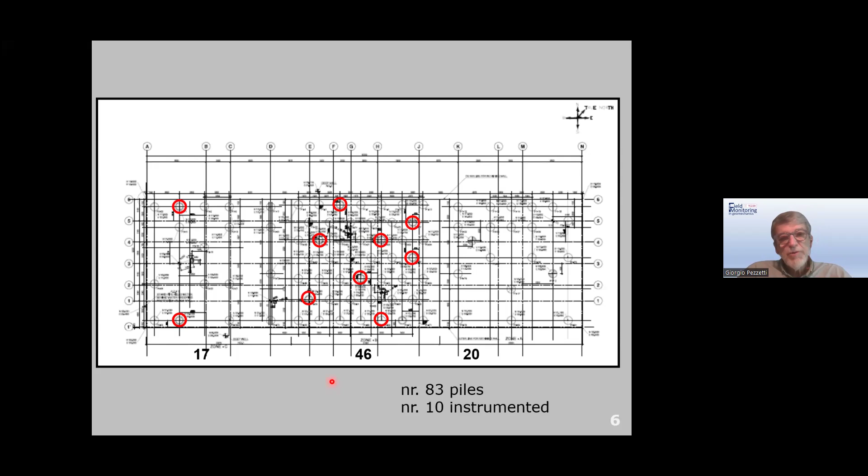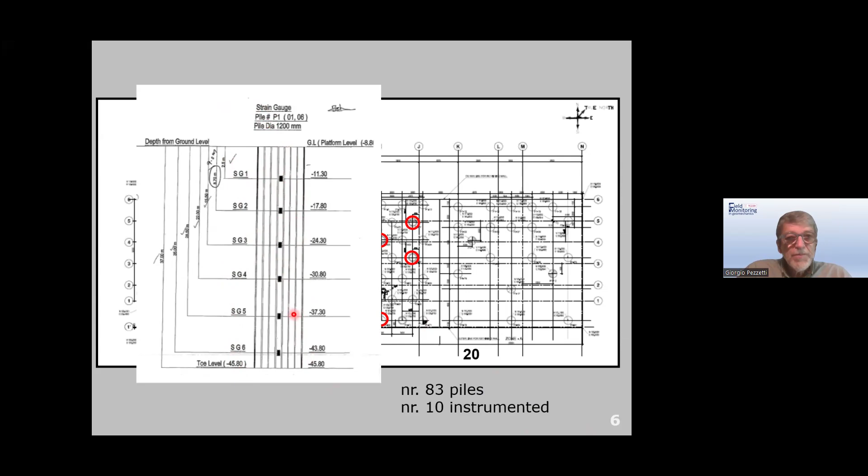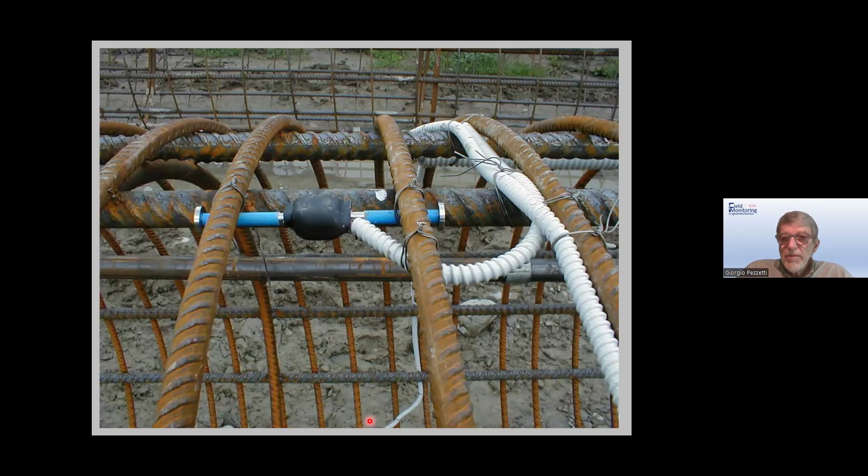The piles were approximately 45 meters deep. The diameter was 1.2 meters. And the request was to install 6 sections of strain gauges, 4 strain gauges each section, at different depths in order to measure the distribution of the load. Strain gauges, the classical strain gauges with vibrating wire sensor, have been installed on the cages, and they provided the value of the strain into the pile to be transformed into load.

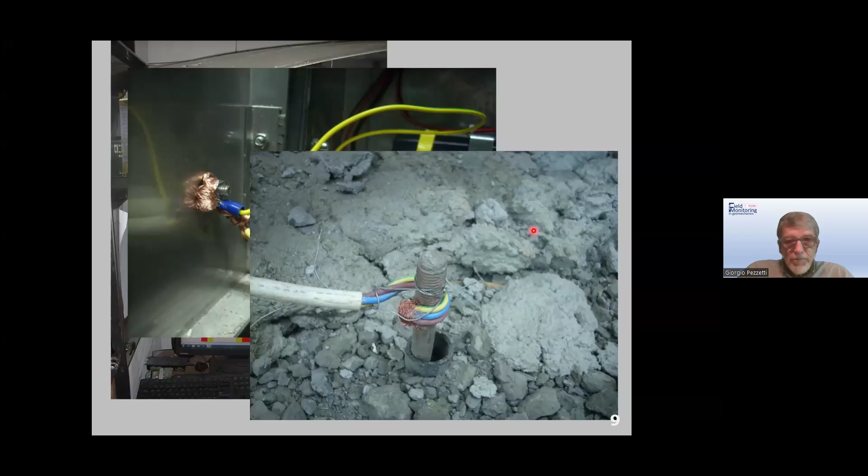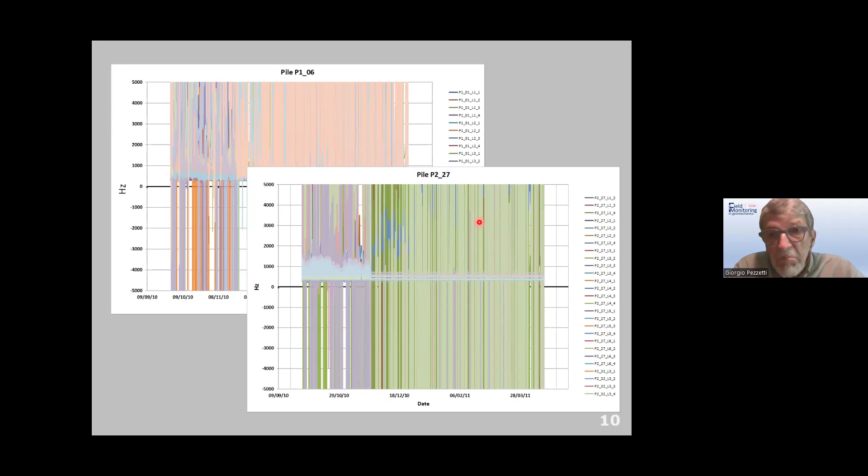Because we started looking into this data in order to understand if it was possible to get some information from this mass of signals, which seems to be completely random. Okay, so we tried to understand what was going on. We selected some piles, and here I show you an example. This is pile number 27, I guess. And this is what we got as monitoring results. You see here the date is approximately from mid-September to end of March, let's say 5-6 months of measurement.

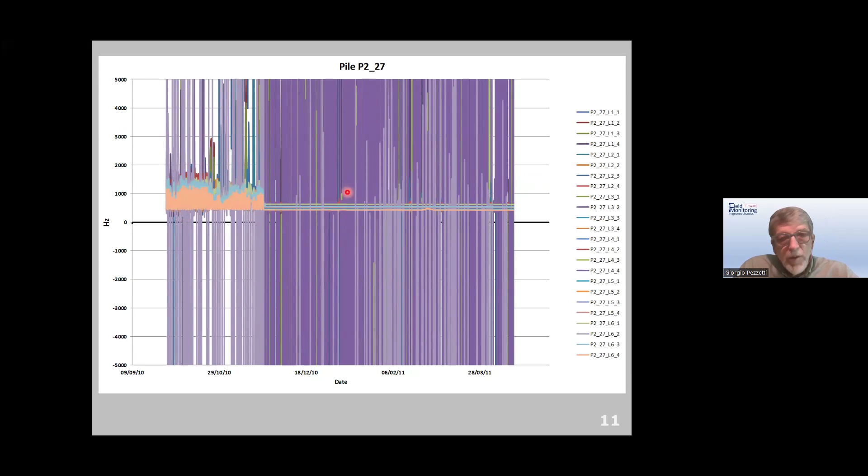We looked at this data, and as you can imagine, the first point we got is that there is an initial part of measurement with a certain behavior, and then another one. Of course, we checked the numbers. Here are the numbers. The gauges were vibrating wire strain gauges, so the values we were collecting were the frequency or the digit. It depends what you use.

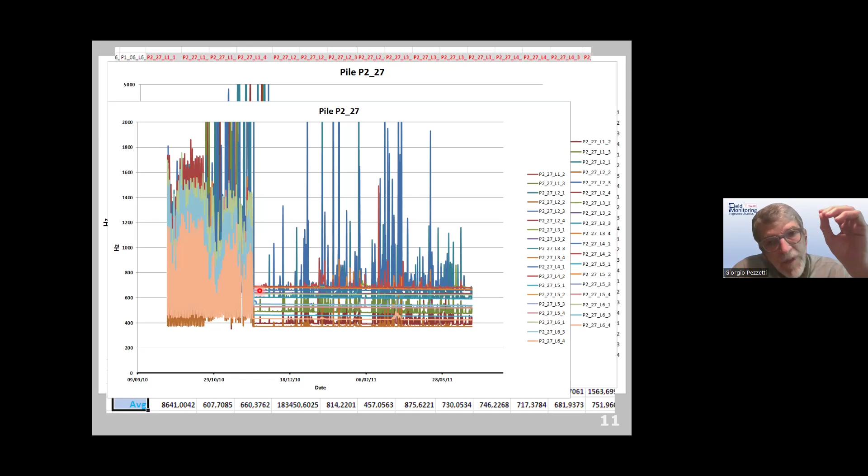And each instrument was providing a value which could have been a real value, because being inside a pile, from the top to the bottom, the load is reducing, or should reduce, of course, because these are skin friction piles. Sorry, I forgot to mention. The load is reducing, and so it is correct that we start from a higher value and go down to a lower. So again, looking into the data, trying to take out what is embedded in the data, even if at the beginning it seems to be a complete mess, we realized that we were measuring something. And so we proceeded with this analysis.

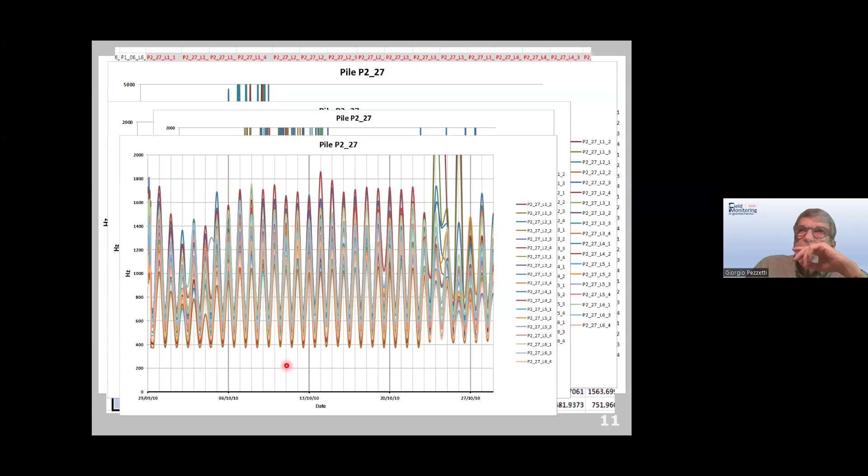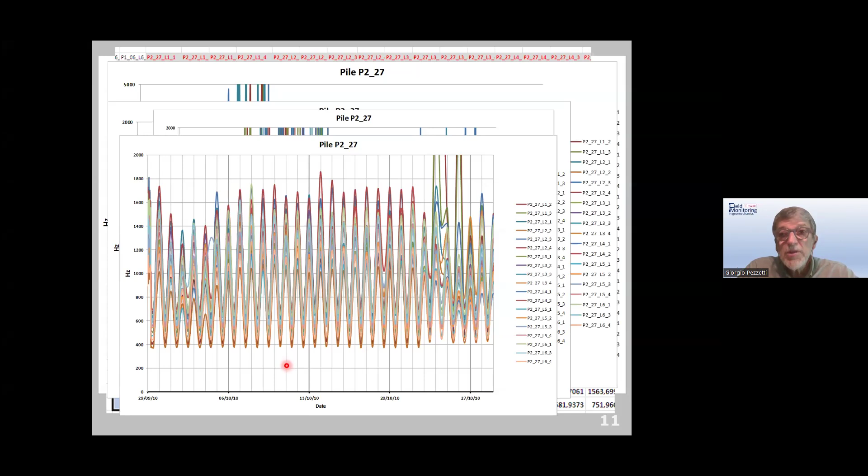And as you see, at the beginning we had this quite unstable part of values, and then stable. Why this? Because if you remember the two pictures I showed regarding the grounding or earthing system of the data logger, we realized that the connection of the data logger to the earthing or grounding, I don't remember the correct English name, sorry, was not good enough. Or better, the area where we installed the ground stick was a very disturbed area because they were building the building. And so there was a lot of machinery working there, connected to the same power line, and this created this disturbance. When we realized this, we disconnected the ground system and we obtained something better.

But there was even another point that we realized. This is the same graph as before, just changing the horizontal scale. And you see this fluctuation, this sinusoidal trend of data before reaching stability when we disconnected from the ground. So we said, what is going on there? We tried to analyze the situation in more detail. And when we moved to the next part, we saw that if we cancel the initial fluctuation part and use a new zero point here, that is the date when we disconnected, and we again filtered the data a little bit, we obtain this plot.

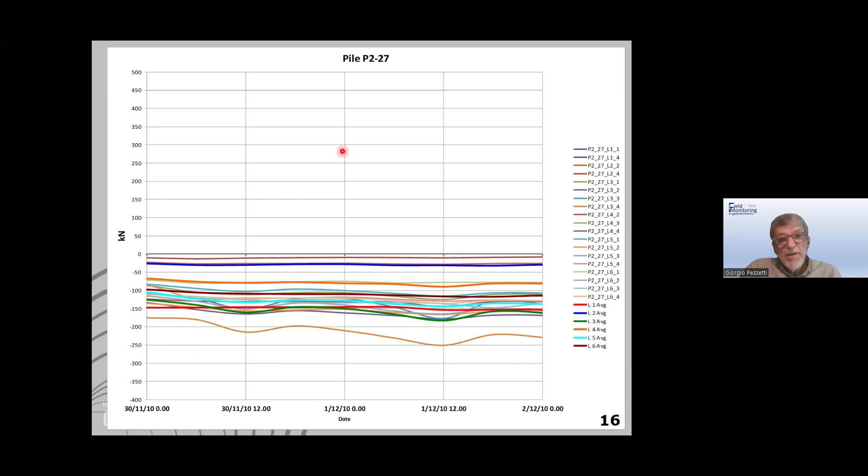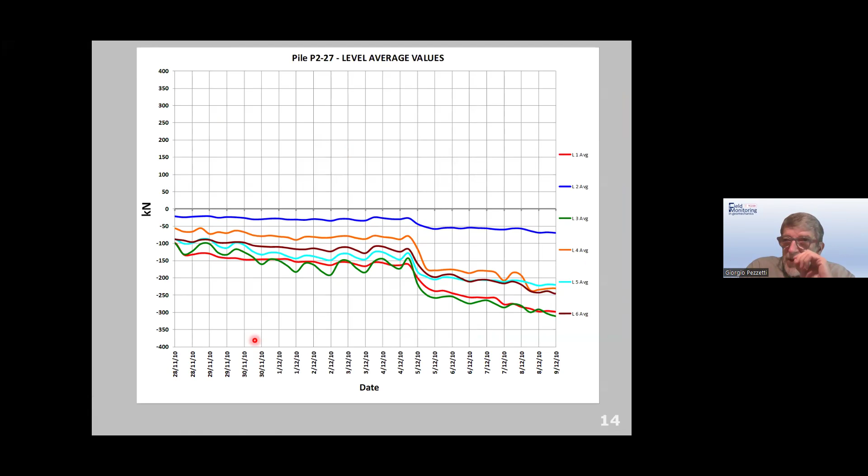And this justifies this behavior, up and down, up and down. So again, we have to analyze very carefully all what we can say is the context where we are measuring. Because if we just look at the point where we are, probably we miss something.

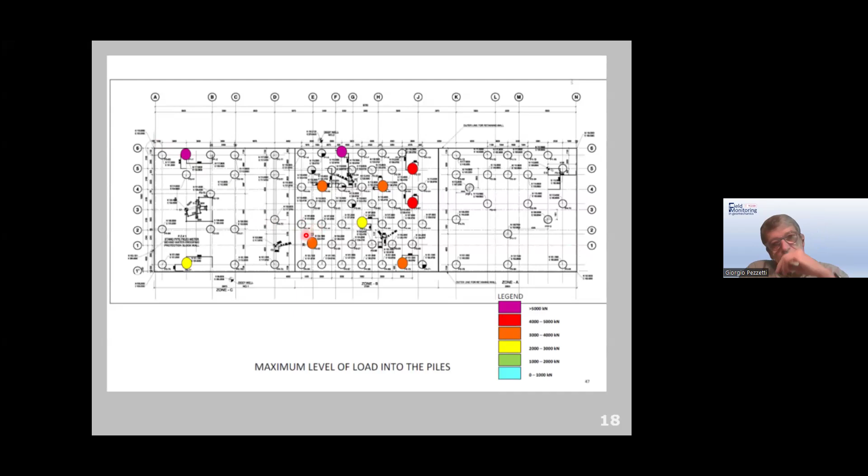And this is what we got. You see the final global behavior. During the construction, the load was increasing. At the end of the construction, the load was stabilized. That was a quite good result if we compare with the initial plots that I showed. Okay. Using this result, it was possible to define a distribution of load from the maximum value, which is the purple, to the minimum, which is the yellow one, and the distribution was that. And the designer used these results in order to verify their hypothesis.

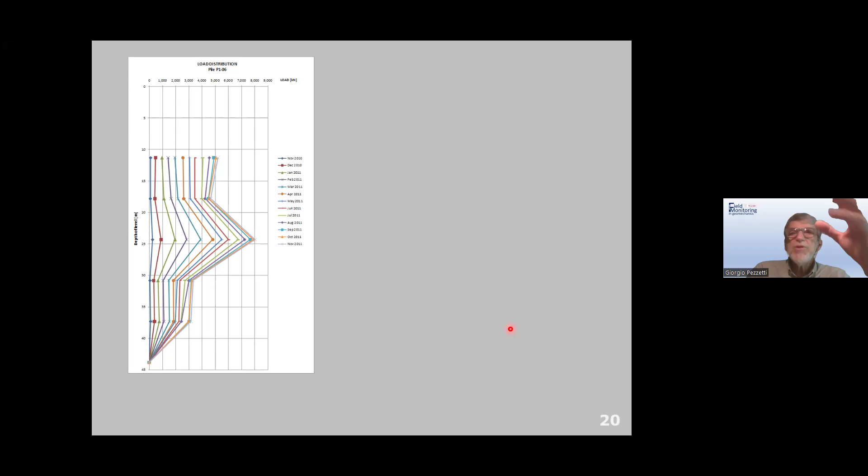And so again, we have to look into the piles in order to understand how piles behave and why we are measuring this. Are the instruments not working properly, or is there a reason for that? We tried to analyze in detail, and again, we started from a plot because I think that starting from the plot is always the best way to analyze data, because the plot immediately gives the idea of what is happening. If we read the numbers, it's more difficult to understand what is happening.

But of course, here, for example, we see that there was one instrument which was not working, another one which was giving very strange results. 14,000 is an unreasonable number, and others which were quite reasonable and similar to each other. So we said, okay, we can use these two and not the others. And by using only these two, we obtain something like this, which is quite reasonable, okay? And we did the same for other piles.

And this is an example of application of what is called engineering judgment, because no one of us knows exactly what is happening here. This is a hypothesis. So we say, two instruments are not working, the other two are providing reasonable data, we use that data, okay?

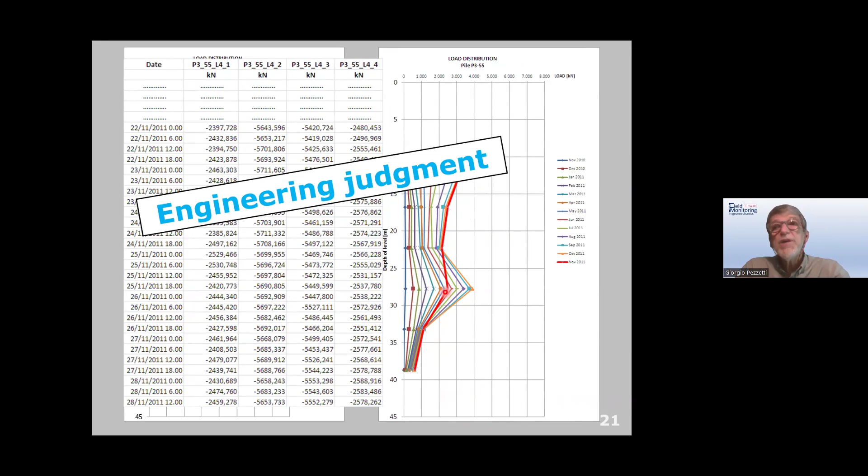But we can consider another point, that in order to move from strain to stresses or to load, we have to apply two parameters, the Young's modulus of the concrete and the cross area of the pile. What is the percentage of variation of these two parameters? In theory, 0, because we say the pile is 1.2 meters in diameter, so the area is such and such square meters, and the Young's modulus of that concrete is that value. But are we sure about that?

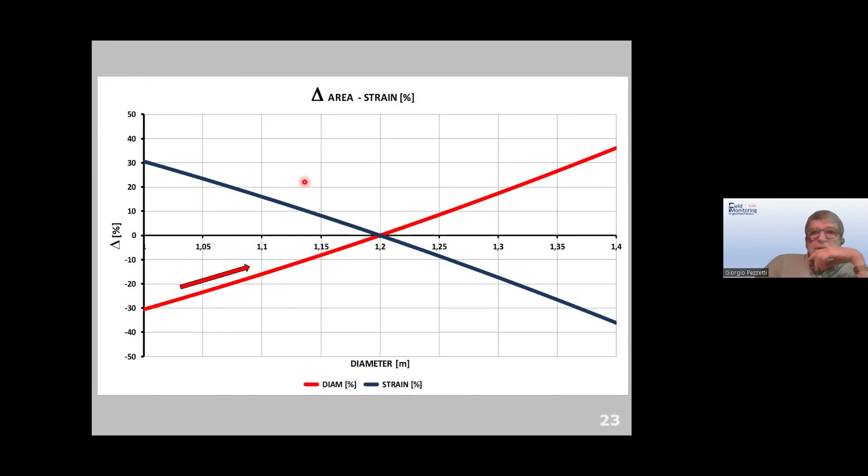And remember that the accuracy or the error or the uncertainty, call it as you prefer, of the measurement made by strain gauges is in the range of 0.5 to 2%. How much is the percentage of variation of Young's modulus and cross area? Look at this very simple graph. These are the nominal area of the pile, diameter of the pile is 1.2 meters.

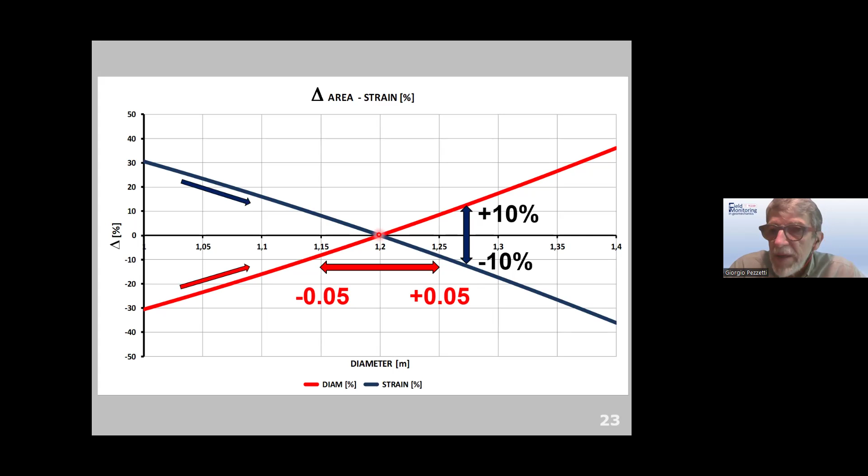I think you agree with me that the diameter of the pile is not perfectly 1.2 meter from top to bottom. It can be a little bit larger or smaller. And how much is this variation influencing the area? So if we move from 1.2 meter to 1.25, that means only 5 centimeter extra diameter. 5 centimeter means 2.5 one side, let's say, and 2.5 centimeter the other side.

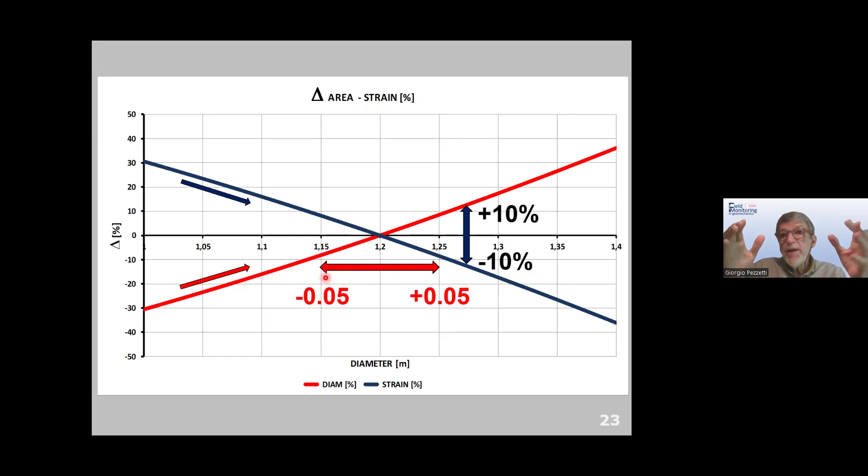5 centimeter in diameter means 10% in area. That means that if at a certain depth the pile is 1.25 meter in diameter instead of 1.2, the area is 10% larger. 10% larger means that strains are 10% lower. And the contrary, if the diameter is reducing 5 centimeter, the strain will increase 10%.

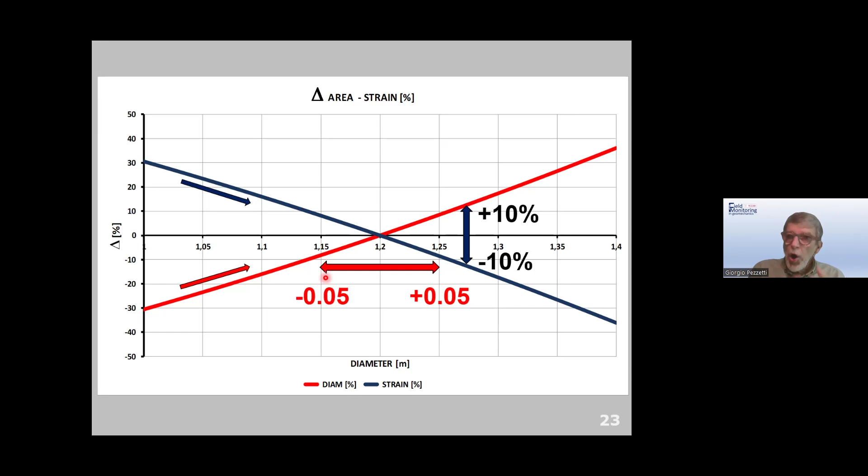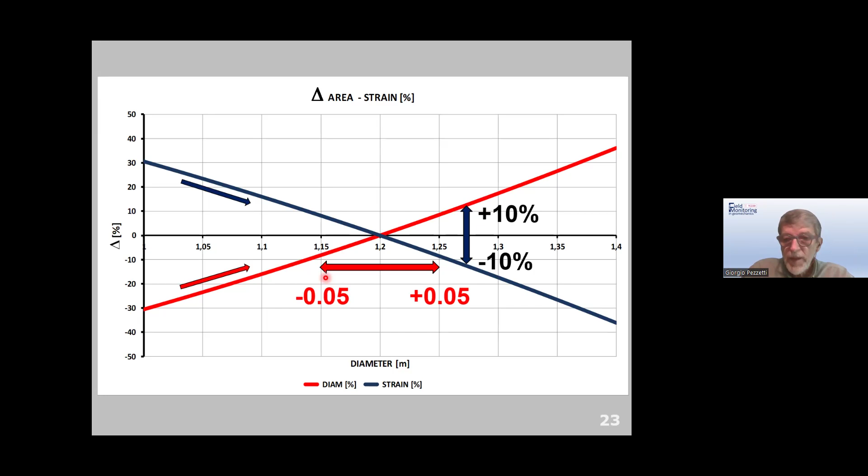So, again, we always say that the instruments are not working properly. They are creating error, they are not accurate enough, but please consider that sometimes the real uncertainty is in the structure, not in the instrument. Same for Young's modulus. Theory says that the Young's modulus is related to the strength and so on. But are we sure that the value is really the one that has been considered by the designer or not? And is it constant from top to bottom?

You know better than me how piles are cast at site. Sometimes the injection procedure is stopped for any reason. So concrete is maintained inside the mixing machines and so on. So it can change a little bit. In case of very high temperature, unfortunately, people start adding water to concrete in order to maintain it at the acceptable fluidity, and so the modulus can change.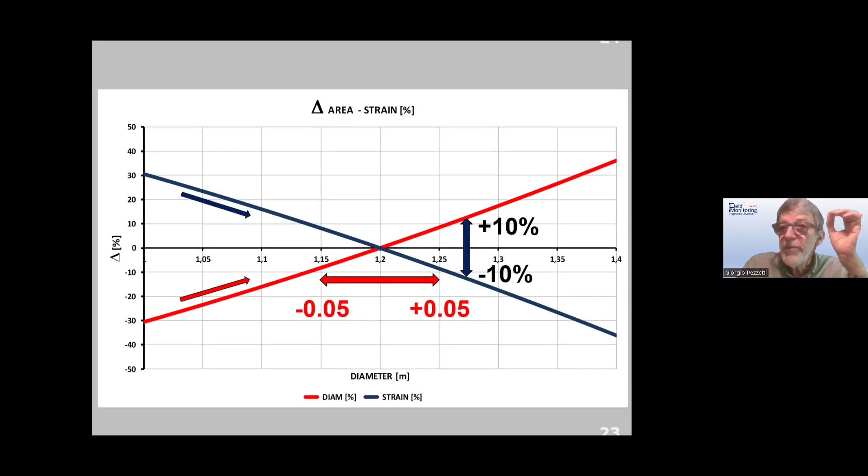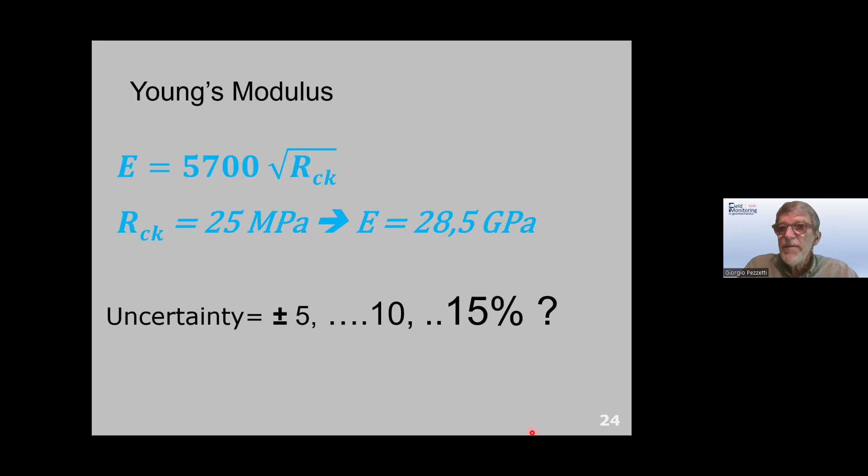Again, how much? 5%, 10%, 15%, I don't know. But probably much more than the 0.5 or 2%, which is the accuracy of the strain measure. So that's an important point. Don't say immediately that the instrument is guilty. We will see a very interesting sentence later on. Sometimes, or many times, it's not the instrument which is guilty. The point is that we don't understand exactly what is going on, or we don't spend enough time to understand what is going on.

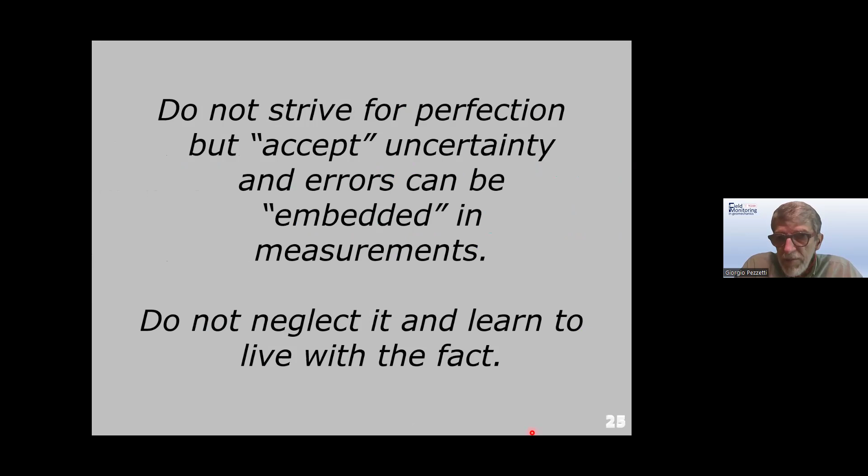That means that we don't have to strive for perfection. We have to accept uncertainty and error because they are embedded into the measurement. Don't neglect them, but learn to deal with the fact. The world we are facing is a world which is affected by error. We have to understand where these errors are, what the magnitude is, how they affect the measurement. Don't say immediately, no, the instruments are not working, throw away all the measurements.

The strain gauges in the piles we have seen are representing what is going on in the system, with all the problems we have seen, considering the tidal effect, the area reduction, the Young's modulus variation, the fluctuation of the signal due to the electrical problem, and so on. They are measuring what is going on in that specific status. So these are the words we have to remember. The number is the value, uncertainty, measuring unit, but the specific status of the system.

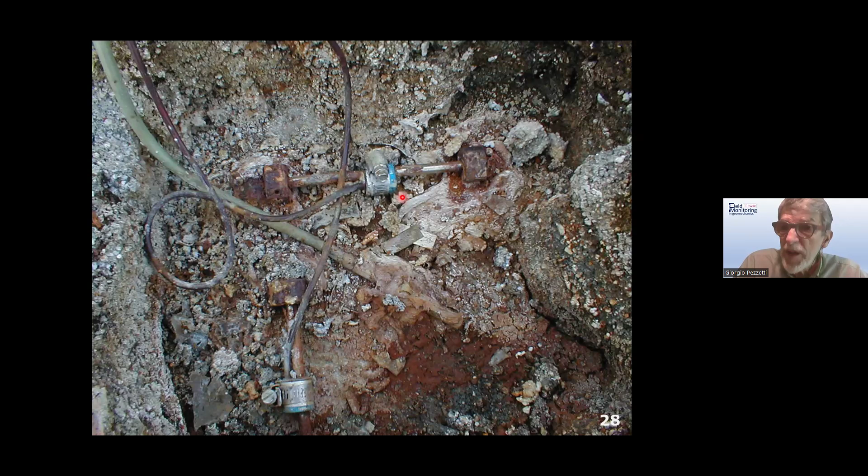That's important. Because a strain gauge like the one we have seen before, in a situation like this, is in concrete completely damaged by some chemical attack. If they are measuring something wrong, is it a problem of the instrument itself or a problem of the context? The instrument is measuring what it has to measure. And as Alex Feldman said almost 20 years ago, result expectation ruins the gauge innocence. The gauge is innocent till proven guilty due to design, misuse, or due to interaction with the material surrounding it.

Please, I'm not saying that the instruments are always working perfectly. We know that instruments have problems. But before saying they are not working, we have to understand what is going on around.

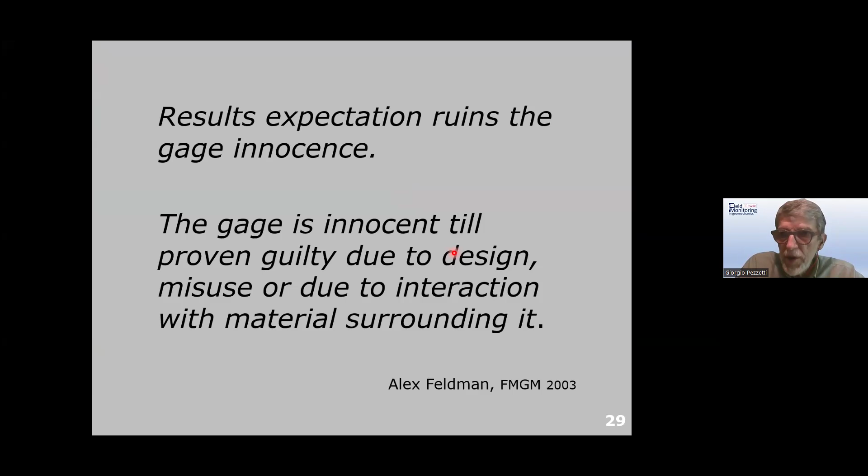And of course, when you collect data, we have to validate. What does it mean to validate? It means that we have to start from the measured data and end up with the presented data. Inside this process of validation, you should include all the analysis we have mentioned before and many others if necessary. So we have to check the operational condition, the working condition, the signal collection, the data reduction.

Data reduction, go back, loop of analysis, check and act. So it's continuous. We don't say that we start from this point and go down to the final point in a straight line. No, we have to stop at every step to verify if everything is correct.

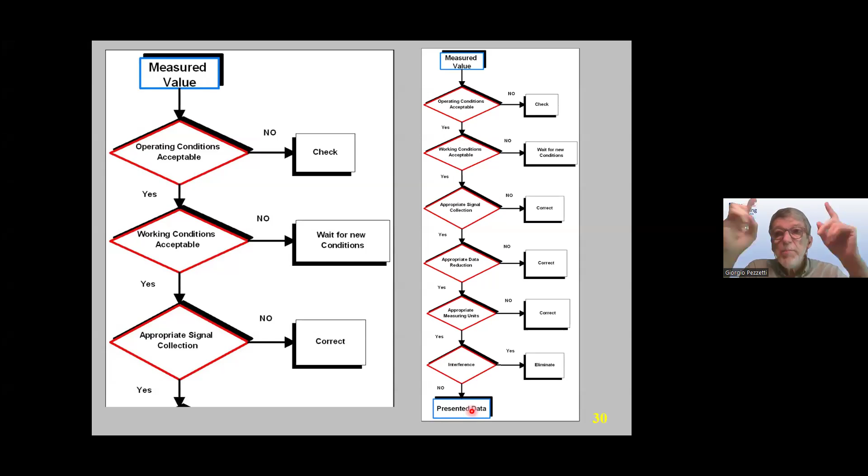Okay, so time is running, but this is another very interesting point to mind. Don't consider that from measured value to presented value, it is just a matter of mathematics, that you apply a formula to the value you have collected and obtain the final result.

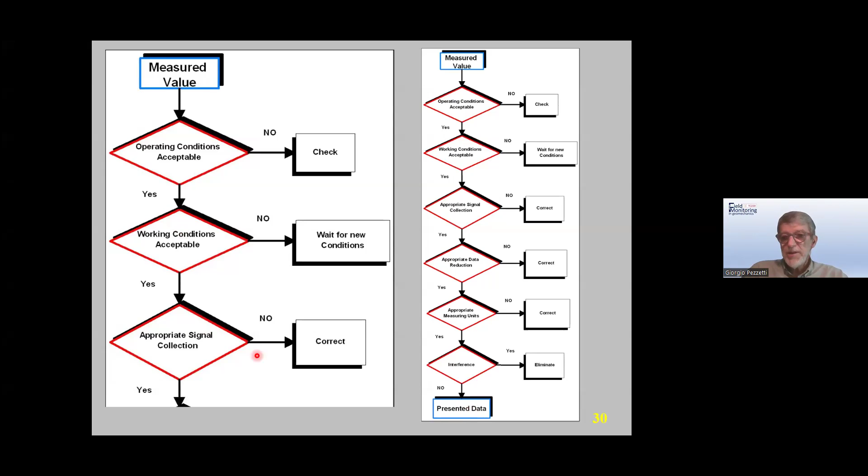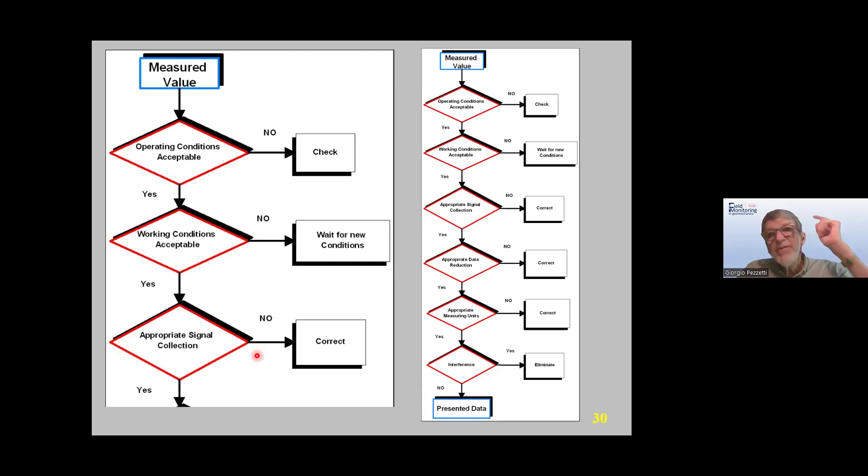Yes, theoretically it is, but in between you have to consider all these steps. For a good and correct monitoring approach, you have to continuously check this—not only the first time, but every time you collect one new data point, you have to redo this process.

How to present data? Too many times we, as engineers, like very much to present big reports with a lot of pages full of numbers. We think that numbers are the God. Yes, they are, but in order to understand, as I said before, we need to condense all the information in the simplest way.

And the simplest way, to me, is the graphical presentation. So instead of presenting pages and pages of data, it's better to present a plot and, if possible, a synthesis of this.

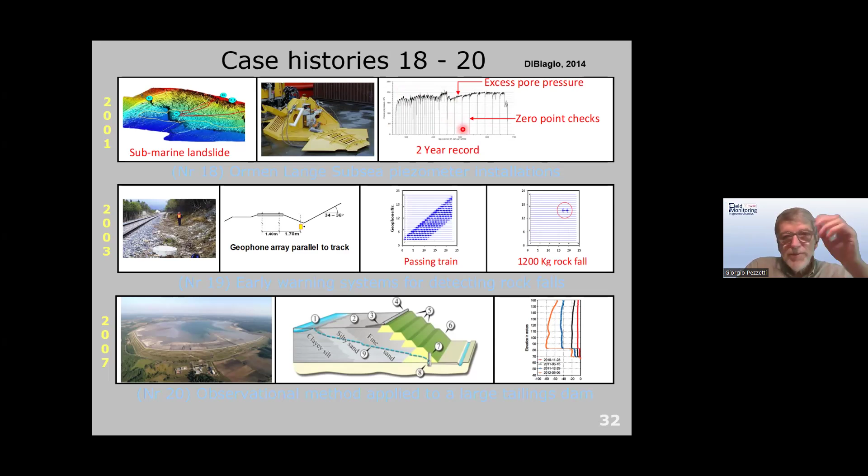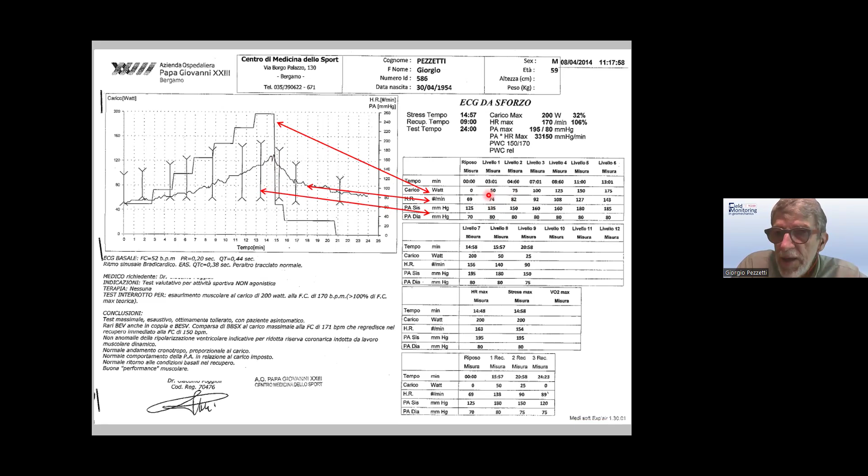And you see the plot and the key numbers here. You have a table with the key numbers—minimum, maximum, average, and so on. You immediately understand what is going on. If you look at pages like this instead, you don't understand immediately.

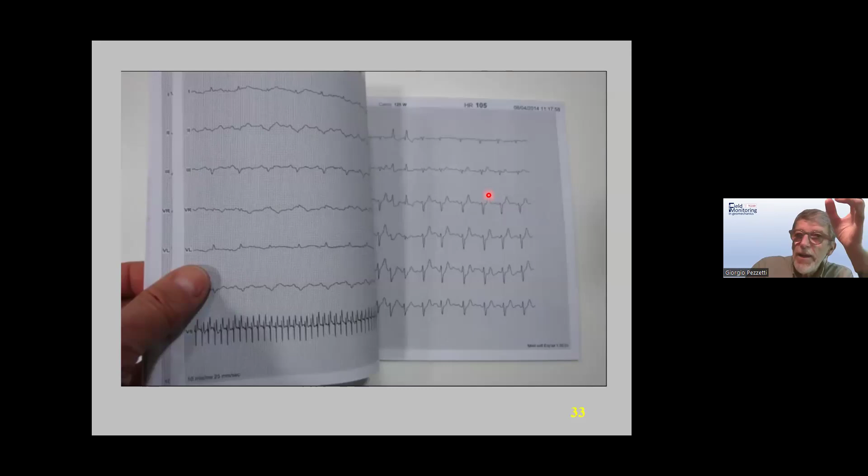The point is, imagine that your monitoring system is an early warning system. You have to decide whether to close, for example, a road because a landslide is going on, or to close a bridge because one pier is moving. To analyze pages and pages of numbers or plots like this, you are not able to immediately understand what is going on.

If you have a synthesis like this, you immediately understand what is going on, because you see the maximum values, the variation of the values, and so on. So please, when presenting data, try to make a synthesis of everything, okay?

So let's go to the conclusions. This is a sentence from Peck, who said that a good engineer has a feeling of the appropriateness of his solution from the narrowest technical details to the broadest concept planning. So again, from the detail to the generalist. His judgment, the engineering judgment, tells him if each step is sound and if the whole enterprise is sound. Never concentrate on a single point or just on the broadest view, but continuously move from one to the other.

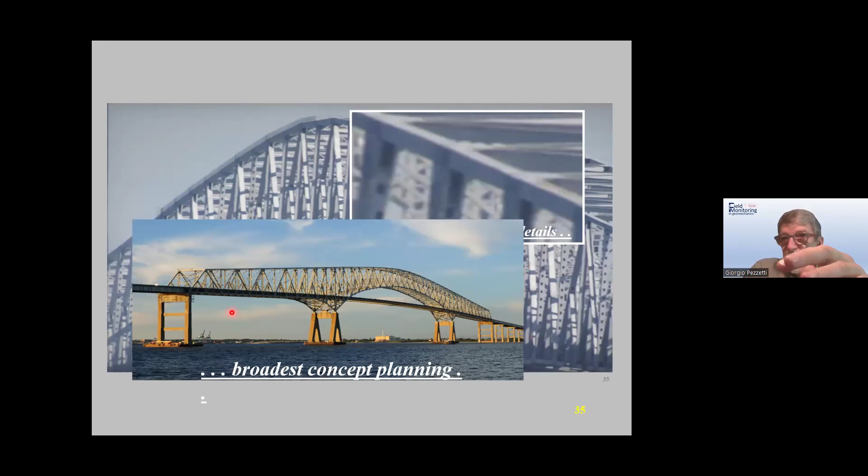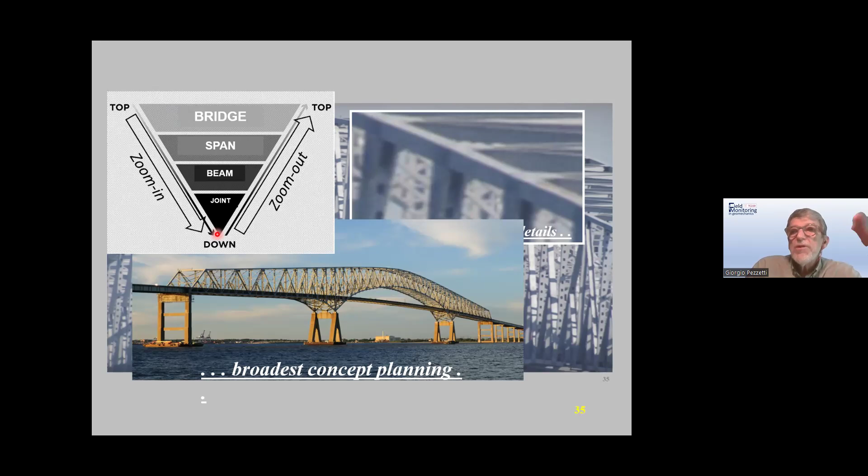The answer is neither the first nor the second. We have to continuously move from the joint to the complete bridge, up and down, up and down. We have to zoom out and zoom in to verify what it means that something is changing in a single point. What is the effect on the whole structure of something changing in a single point, or what is the effect on a single point when the whole structure is changing its behavior.

Monitoring data have to be understood, because very often it provides what we don't know, and allows us to understand the real behavior of what we are monitoring. The point is that it provides information about what we don't know. If we were sure about the behavior of something, why monitor? No reason to monitor. We are monitoring because we are not sure, because we don't know what is going on.

And I always used to say that if we realize that our knowledge is limited, that we don't know exactly what is going on in the structure, we understand the need for measurement and monitoring, and we will enjoy the surprise of obtaining even unexpected data. So when we obtain something unexpected, don't consider it rubbish or something not correct, but try to understand what it means.

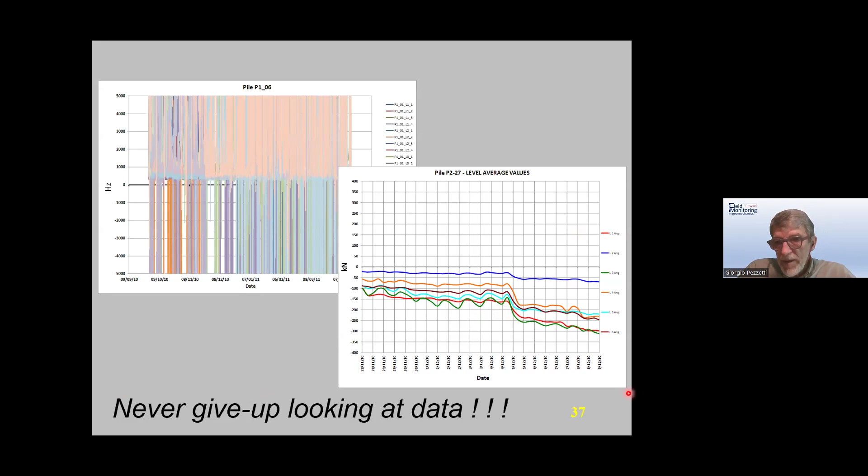Thank you, Giorgio, for the wonderful lecture. Certainly, we have some questions posted in the chat box. You want me to read it for you? Yes, I don't know the plan of Andrew, if he has to leave or can stay, if he'd prefer to say something, Andrew, now. No, I can stay. That's fine. Okay, please carry on with the questions.

Thank you, Andrew. Professor Satish Kumar Sharma asked about this excellent case study: kindly elaborate on the correlation between frequency of vibration and load. What are the assumptions in this correlation?

As I said, the instruments used in this case were vibrating wire strain gauges. A vibrating wire measures the frequency of vibration of the wire. The frequency of vibration can be correlated to the strain in the gauge through a formula, which I cannot write right now, which uses a factor called the gauge factor—a constant value related to the materials composing the gauge and its geometry. So for moving from frequency to strain, we have to multiply the square of the frequency by this gauge factor and divide the result by 1000.